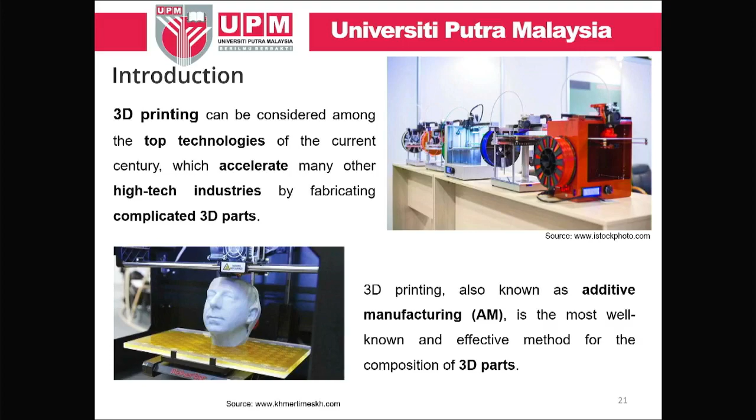Some of us actually know this as additive manufacturing because of the process involved. So I hope the animation is working.

You can see this is a comparison between machining and 3D printing—just a little bit inverse. Machining normally uses a subtractive method, so you have to remove the material. At the same time, we waste energy, waste material, and waste human labor. By doing this machining, you can see from this animation that all the material is removed from the block that we want to machine.

This is the machine at our lab—this is the list, I'm going to show later on how the process is done. And then this is additive manufacturing: we start layer by layer, and at the end you have your part. So it's very easy and simple to do.

But even though it's simple, there are a lot of processes inside that, as well as parameters that you have to control during the printing process.

This is just to show the printer that we have at the lab—we call it Race 3D. There is a voice for that, but I purposely muted it; this is just the machine that we have at the lab. So anybody interested to print something, please come and see me, and I can print out whatever design they need, limited to a certain dimension and so on.

So we're going to go later on with that.

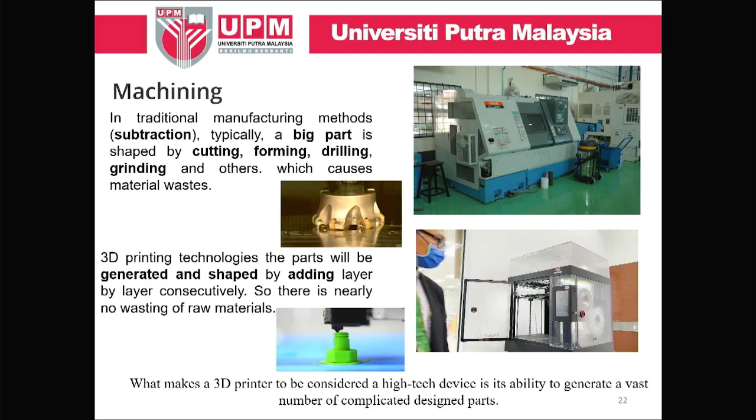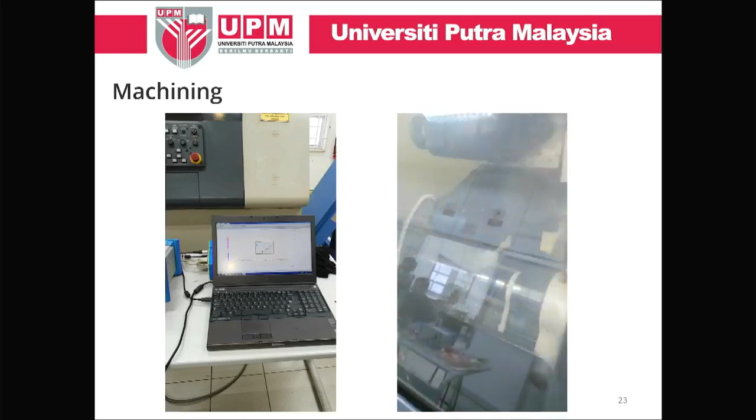This is basically how we measure cutting force during machining. You can see that we have a dynamometer. We bought it for 300,000 ringgit, and I think it's well worth spending the money because we can get the mechanism of the cutting process. This is the cutting process that our Vice Chancellor has been asking about just now.

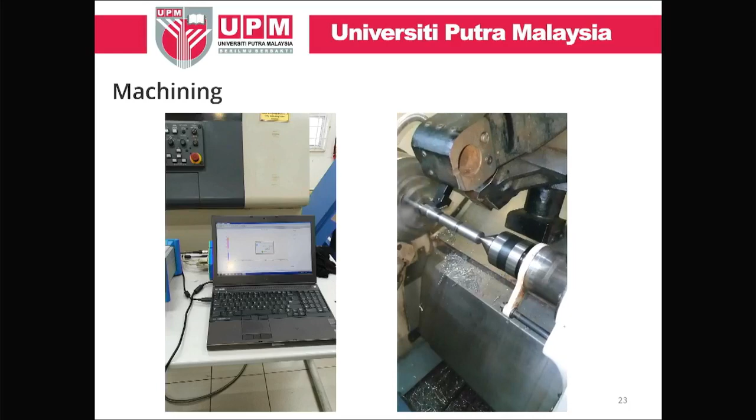I hope he can understand what's happening in machining. So basically, it comes with this, we call it cylinder stock. You put this cylinder stock in the jar, then you clamp it. After that, you use this cutting tool, a special cutting tool that we developed together in the lab. When you machine, we rotate this, the cutter comes, and then you can cut according to the design that you have.

I hope the video can capture that. So we have to find out what happens during the machining, because even with our naked eyes we cannot see the mechanism of what happened inside. The issue with machining is that we have to remove the material, and at the same time control the temperature during the machining.

This was done by Dr. Rosdi. Last time we managed to get a new cutter, we call it dual point cutting tools, and it's still in the process of commercialization. I need to see NCPI later on to make sure this can be commercialized.

This is the work that has been done with Keio University, because at the time we did not have a 5-axis machine. We try to get it next year, maybe, for 5-axis. We call it composite fiber reinforced plastics.

We have Kevlar, sandwiched with the aluminium, so the thing is around 10mm. It's very hard for us to machine, because during machining we introduce vibration, so we have to control that vibration. The thickness of the web is very thin, about 1mm, so if you make a mistake, you're going to throw away your whole workpiece or specimen.

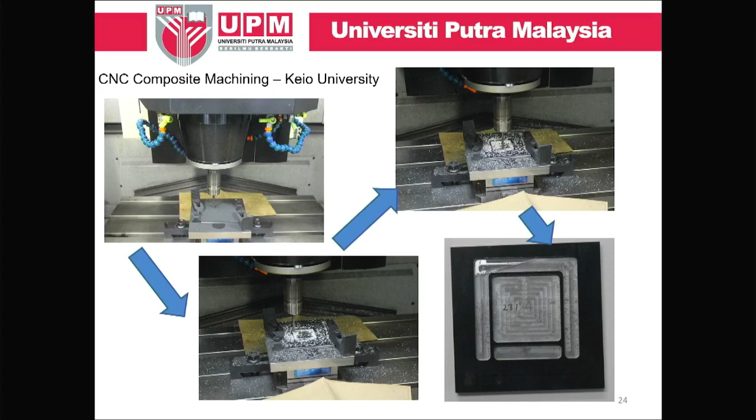Unfortunately, I don't have any more grant to do the research with the ethics approval and so on. So I just stopped with the machine, complete with the nozzle, but it has not been implemented yet for medical use. I hope later on maybe somebody can sponsor me or give me a grant to continue this research.

The reason why is that less waste is produced, because we do it layer by layer. So I'm going to show you some samples here.

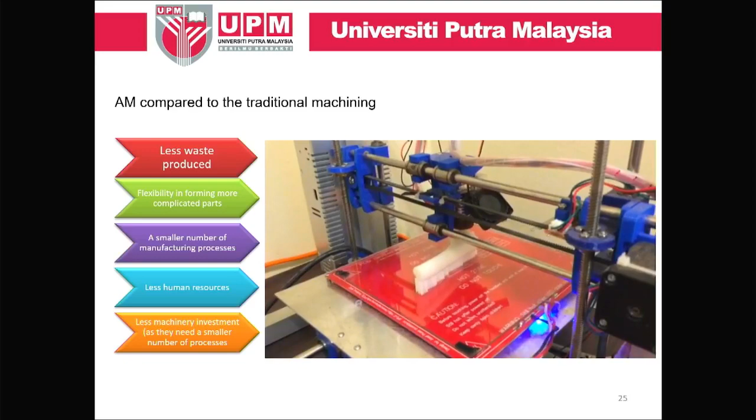It's like a sandwich, like the sandwich you eat today. So it's the first layer, and we print all of the first layer, then we come again with the second layer, and then the third layer.

This is the problem we're facing with 3D printing, because layer by layer, there is a possibility of defects between the contact of the first layer, second layer, and third layer. So that's very basic about 3D printing.

Then I would like to highlight as well, this one that I think everyone has seen. This is the bone, a replica of the bone we can print using our machine. It's very nice and easy. If the Faculty of Biomedicine needs it as well, we can print it out of our own machine.

And this is the one that nobody wants to see. This is a skull, alright? Oh, the Datuk Vice Chancellor wants this. Okay, I'll give it to her.

This one, the machine capable of printing this, we call it porous bone. The reason why we printed this is you can put this inside your body if you got an accident and so on, it can replace the damaged bone, and then it will eventually promote the growth of the cell bone. So that is our intention. But there is an issue that might be a debate later on, so I'm not going to go into that.

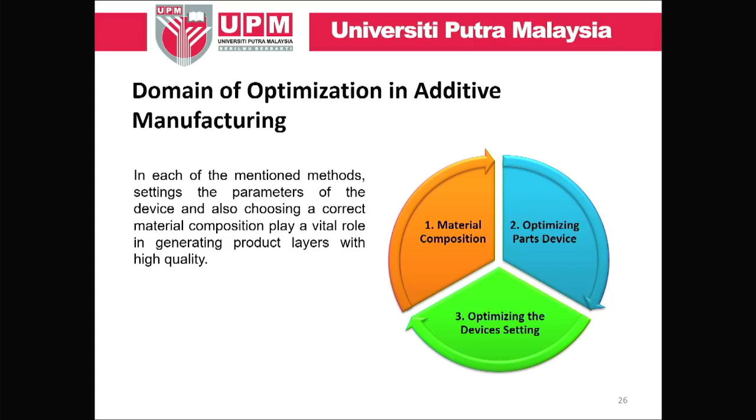In optimization of additive manufacturing, we have three areas. The first one is material composition. Second one is part device, and the third one is optimization of the device setting. So in a nutshell, for the basic understanding of 3D printer, basically it will consist of three areas. In terms of technology, it's sintering, melting, and stereolithography based on the resin.

By looking into this, you can develop up to 7 different regions of the 3D printer. The first one is based on resin. Second one is based on material jetting. The one that we have in the lab is material jetting, so that you can get a very good surface finish. And one is binder jetting, this is based on the powder base.

And the third one is material extrusion, the one that I'm embarked in, the research that has been done in. We call it, in short form, FDM. And we have inkjet printing. This one is basically used for biomedical purposes, to print tissue. And some of them might be printing of the tablet that you eat, can use this technology as well.

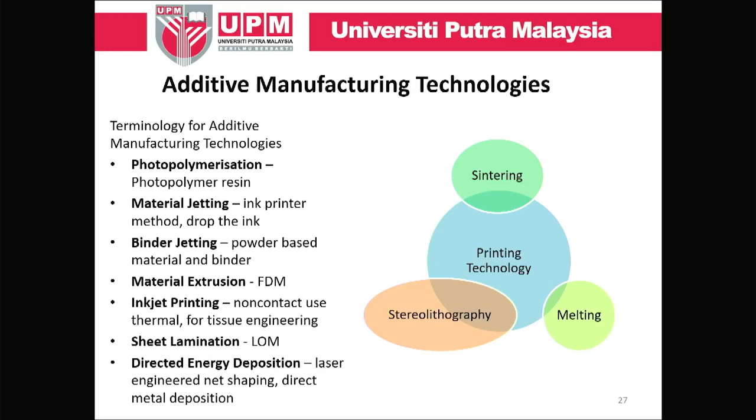And this is one, the old one that you can find, LOM, Laminated Object Manufacturing. And then directed energy deposition based on, so this is basically if you want to print a metal part. And also some of them will be used for printing the aerospace component parts, like titanium and others. So this is the one that I saw in Northumbria University when I did my degree in the year of 1997.

So this is why my passion actually came to this machine. How on earth can this machine produce a very simple part using the CAD design. At that time, 1997, you had to have the server and also workstation in order to use CAD. So it's very difficult, you had to have booked your time to go for the workshop and then design your own part and so on.

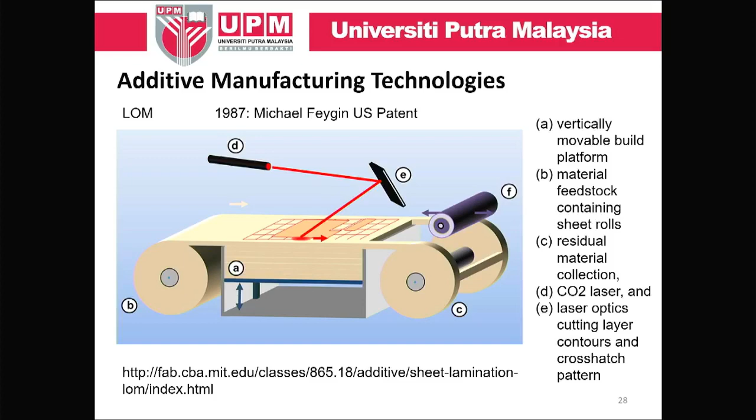After that, you can print using this machine. So what we did with this machine, we can print like a fan. This is a caliper for your car when you brake. So you print this, and then this is a cover for what we call gearbox. And what we did with this, we have this pattern and we put it into sand casting. So we remove the pattern, afterward we put the aluminum or the steel to make sure that you can get your gearbox. So just imagine how important manufacturing is for you, for your life, in fact.

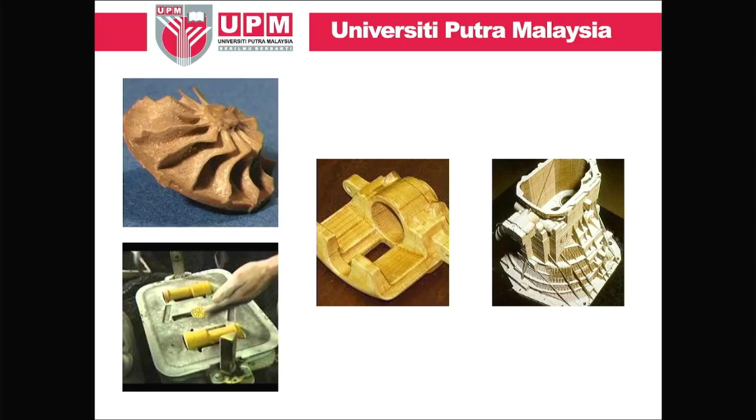So we have another method like sintering, this is basically based on the powder. And then we have another method called melting, this is the one that actually Prof. Tuah just mentioned. We can produce the pill using this technology. So you can mix or pre-mix inside that, and then you can produce the pill according to whatever ratio that you require. So we call it melting technology, and then it looks like injection molding. I'm working on that, I hope you can understand what injection molding is, by the way.

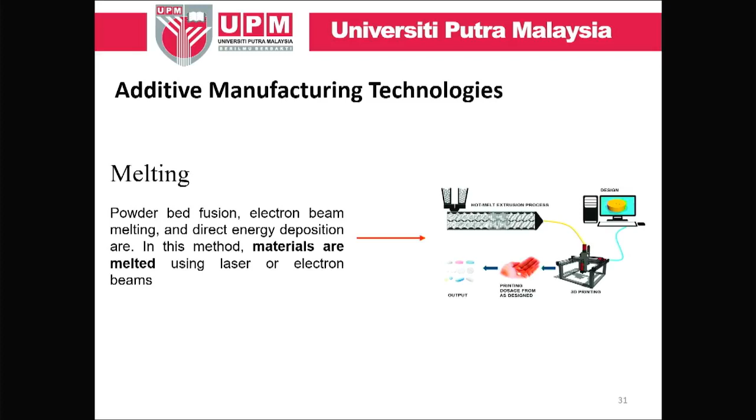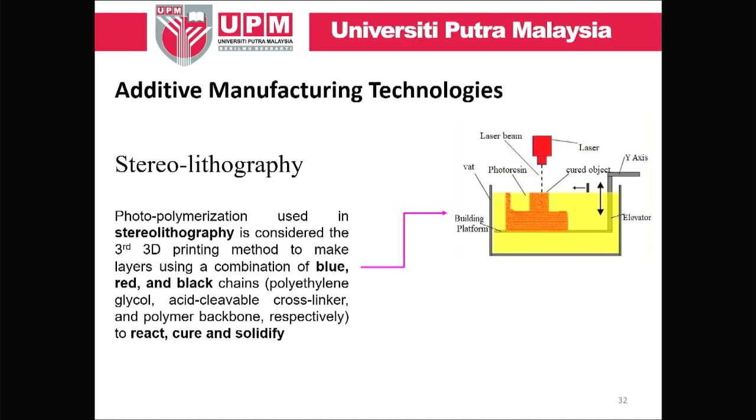And then this is the one, actually, the best one for the surface finish. If you print using resin, definitely you're going to have a very good quality surface finish. And then the one that interested me and Dr. Aiman, I cannot see Dr. Aiman, maybe he's waiting outside, so this is FDM.

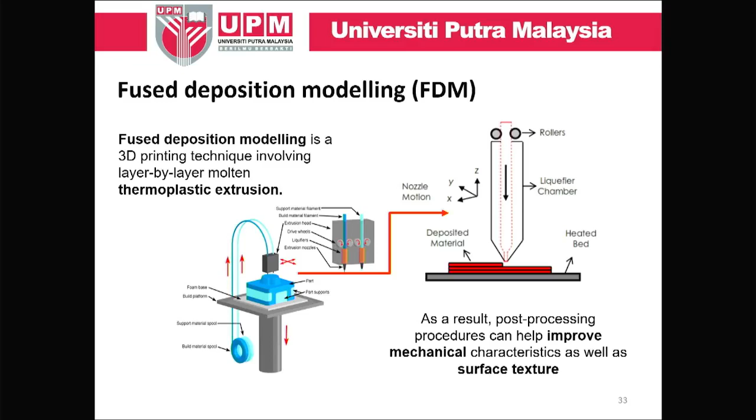So eventually you're going to have the raw material of filaments. This filament will be fed into this liquefier chamber so that you can heat the filament, it becomes liquid, therefore you can print after that. So might be someone interested in this, these are the parts that we can produce using this technique. Okay, this is metal, this is basically what you print and then you can use straight away, no need for another second process and so on. So it's not a prototype anymore, it can be used straight away in your application.

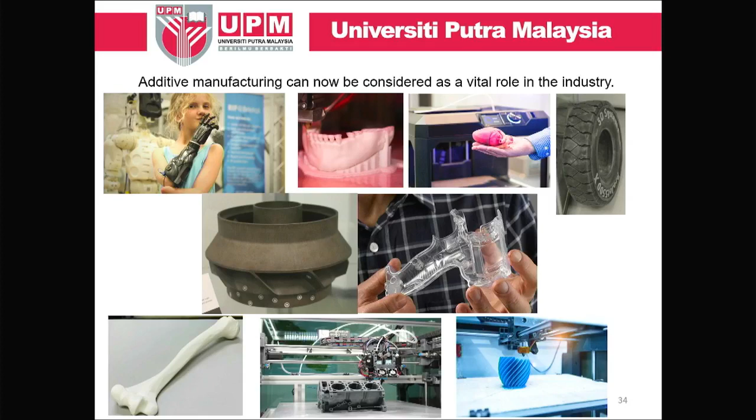Now I'm going to move a little bit into the research that we've done. As I said, we have conditions, parameters, and also process that we have to make sure we can have optimum parameters for.

First one is the material itself. Second one is the part, like the nozzle diameter and liquefier shape, and also the process itself, including build orientation, layer thickness, infill pattern, and infill temperature.

In order to reduce the waste of time, we use computers to check whether the optimum parameter can be achieved. Usually we use CAD—most of us in the lab use SolidWorks or CATIA for the design. After that, we use computer-aided engineering, like finite element analysis, to analyze the optimum parameter before we put it into the machine.

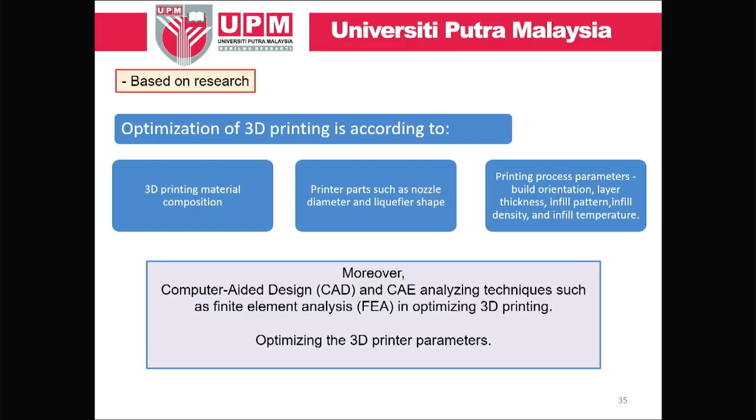This is work that has been published in Q1 and Q2 journals, Alhamdulillah. You can see different temperatures give different results, and we have to control this temperature. That's why I use optimization methods like fuzzy logic, genetic algorithm, neural network, and so on, to make sure we get very good surface quality when we finish.

At the same time, we are looking at the mechanical properties of the part we produce. In a nutshell, if you have a low temperature which is not according to what the material requires, you're going to have low bonding between each layer, which affects the surface finish—what we call the engineering RA value.

If you excessively give the temperature up to 260, which is for PLA, then you're going to have the road width—not the road, we call it road width—become bigger, expanding during the process, so you cannot get a very good surface finish again. That's why processing parameters are very important.

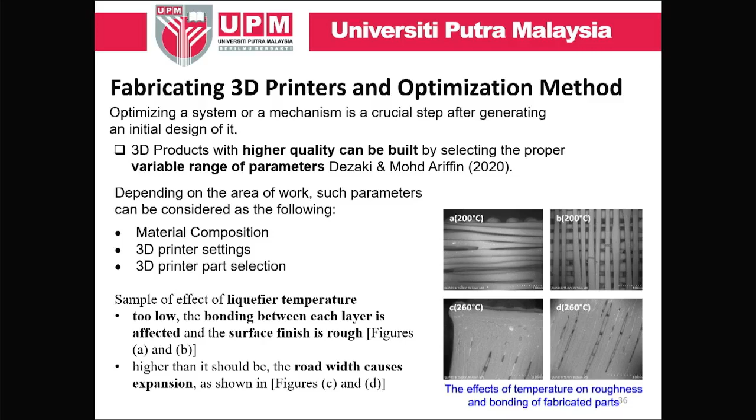This material work is done with Prof. Tariq. We are looking at green composite material—we add kenaf to PLA to make sure the green material can be sustained, you can plant it and so on. Afterward we make that become a filament, which goes through the nozzle of the 3D printer.

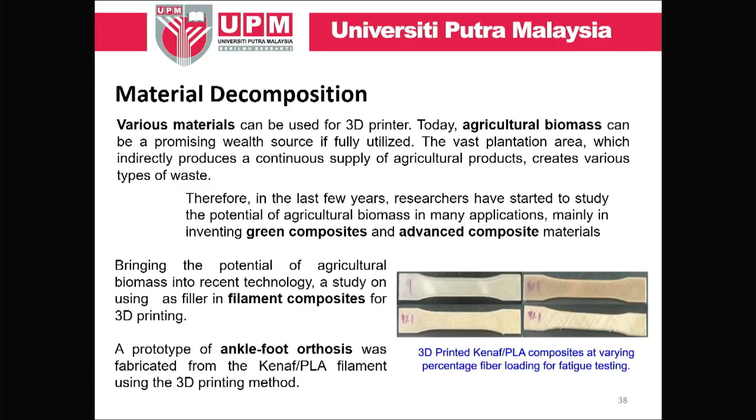This is a test specimen, basically for the fatigue test to make sure it complies with the standard or not. This one went through our test, and fortunately we managed to print an ankle foot orthosis using this material.

As I said before, our purpose for developing this machine was to print biodegradable material, based on PMMA. So we have to test the compression—you want to compress the material so you can know what load the material can possibly take.

It's very important because we need to know the load. Otherwise, if you put this material inside somebody's hand or leg, and when they stand up, suddenly it will collapse because there is no load capacity. That's the reason why we test this compression.

Luckily, this material is very strong, and it can be used for the porous bone—it can replace human bone based on our study.

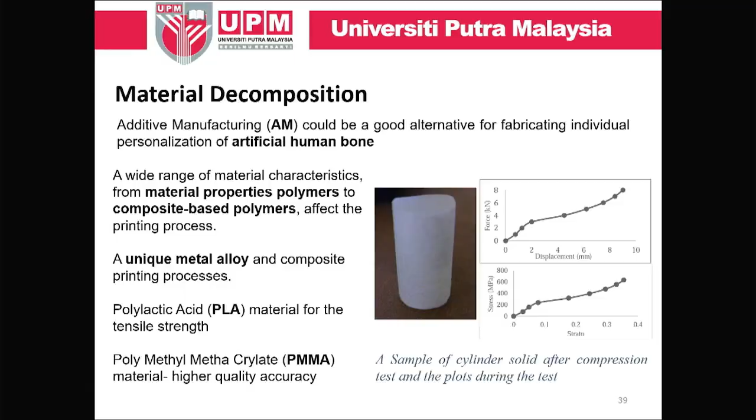But as I said, unfortunately we stopped at that specimen and did not go further, because there is an ethics issue—you have to get permission and so on. That's why we don't go further.

This is the printing process—this is what we discovered from four parameters. In a bit more detail: layer thickness, infill patterns, infill density, build orientation, and distribution temperature and pressure drop—these are what will affect your printing quality.

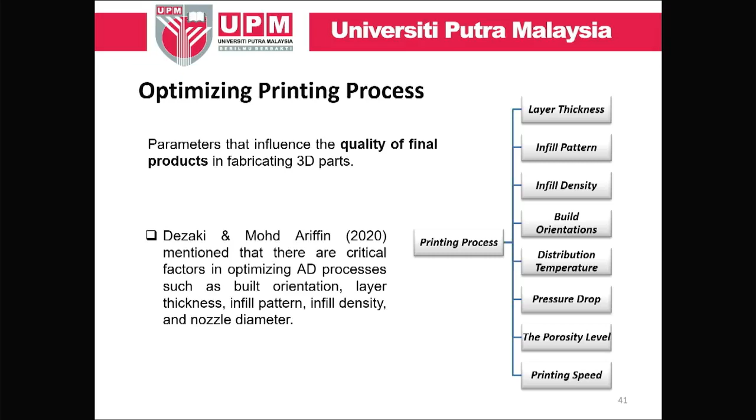At the same time, we managed to get a new nozzle using different diameters. This has been patented, Alhamdulillah, so we can commercialize it and send it to another company for their 3D printing.

This is work done with Dr. Aiman. We found out that in the end, the parameter of build orientation and layer thickness is basically the most important factor affecting surface finish.

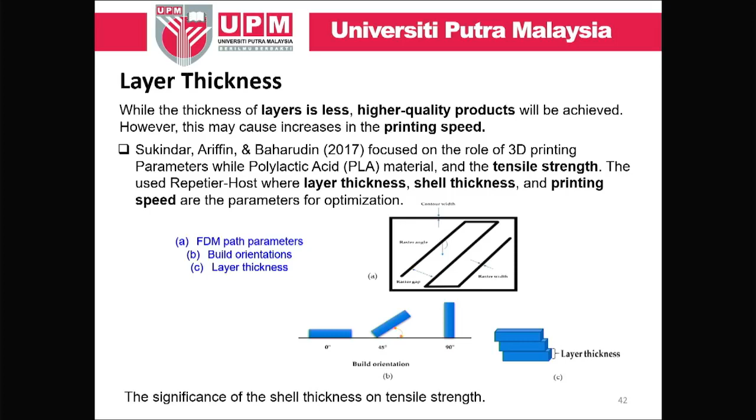I further extended this finding by researching build orientation not only flat, but also on edge, to check whether it could be further improved.

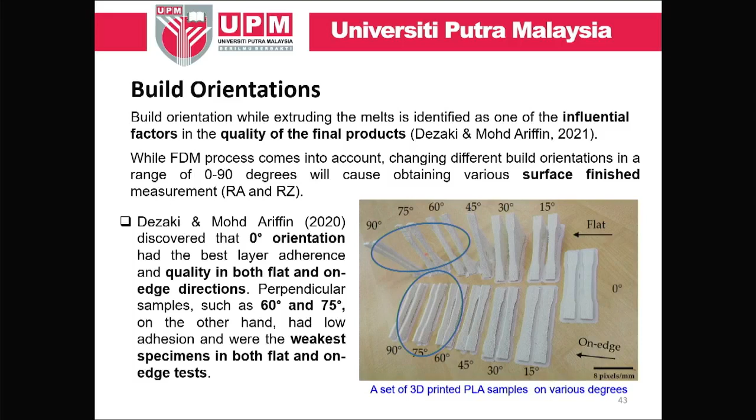From our finding, the 60 and 75 degree checks always give unreasonable conditions, meaning you cannot even print the specimen. So from our finding, for this build orientation, 0 degree is the best one.

You can see from the photo, structure-wise, the RA value and so on—0 degree is the best one.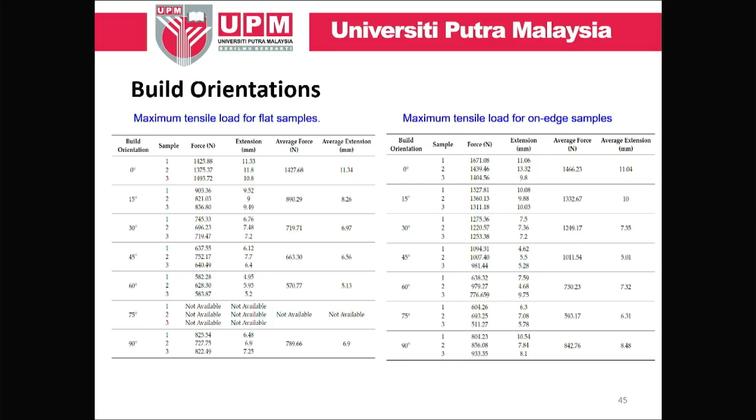I would like to highlight also in terms of porosity level. So why do we need to do this study? Basically, we want to reduce the material, even though in 3D printing already less waste material. We try to reduce again by introducing what we call porosity. So we have different designs in terms of inside the part by using this honeycomb design and also grid design. Eventually, it's going to give you the best in terms of strength to weight ratio.

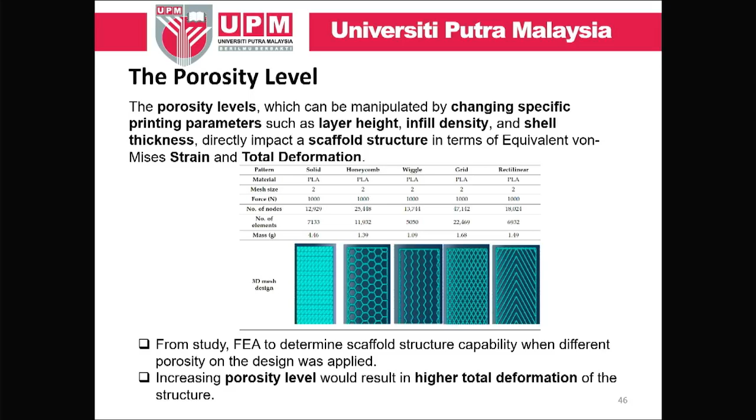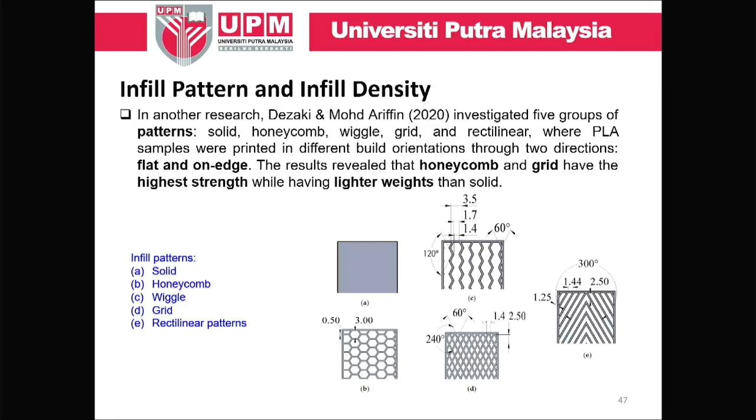So this is the geometry that we designed in our lab using CAD/CAM. After that, we print, and then we get the honeycomb and grid, best in terms of high strength and also lightweight. This was very important for the aerospace industry. We want the one that has very good strength. At the same time, the material has to be very lightweight. Otherwise, you're going to pump more oil into the airplane and so on.

So this infill pattern, as I said before, we want to do it from biomedical or medical grade material. This is very important. If you have a 10% infill, basically you're going to promote more cell growth. But if you have 50% infill, then cell growth is very difficult. So we have to find out which one is better for the bone.

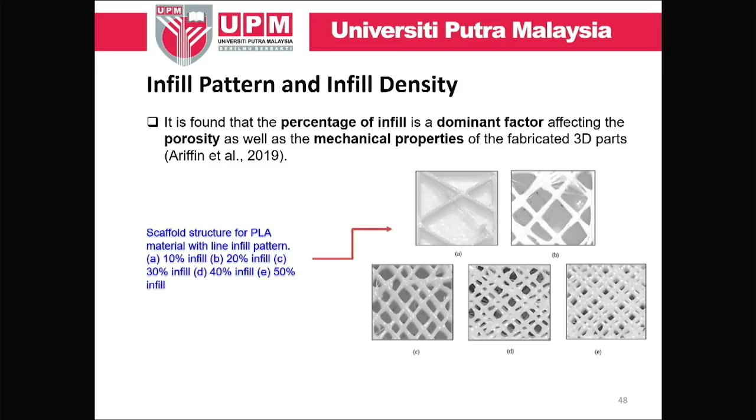And the next one, this is the one that I've been talking about, pressure drop. This is something not discovered before in FDM. Industry already built the machine, but they did not discover this pressure drop. So we managed to identify a pressure drop. If you have a lot of pressure drop, definitely you cannot get a good quality product when you print.

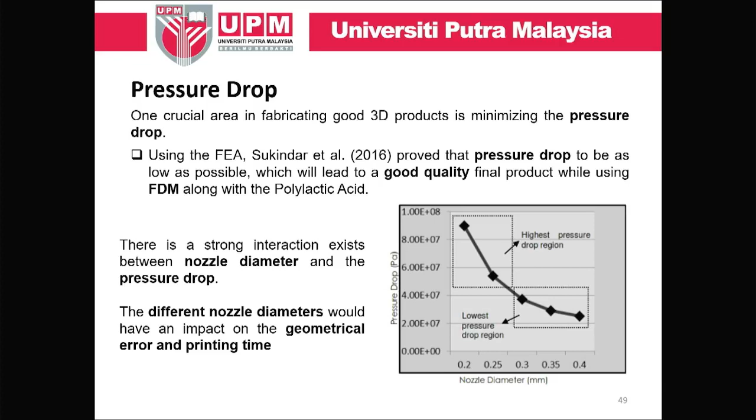So this is the analysis using finite element. You can see that for PMMA, the pressure drop convergence area is 130 degrees for the die angle with 0.2 mm nozzle diameter.

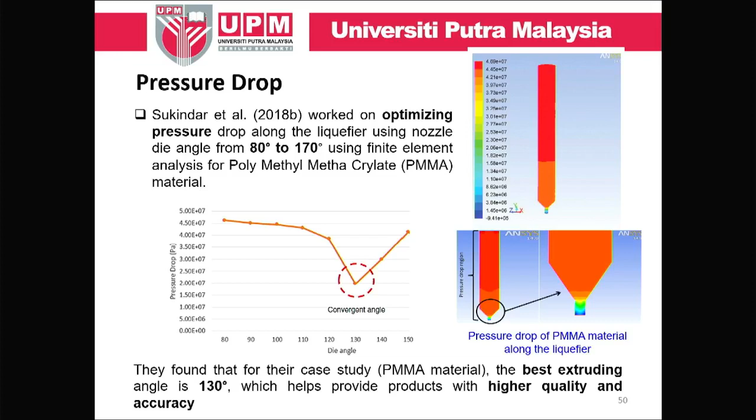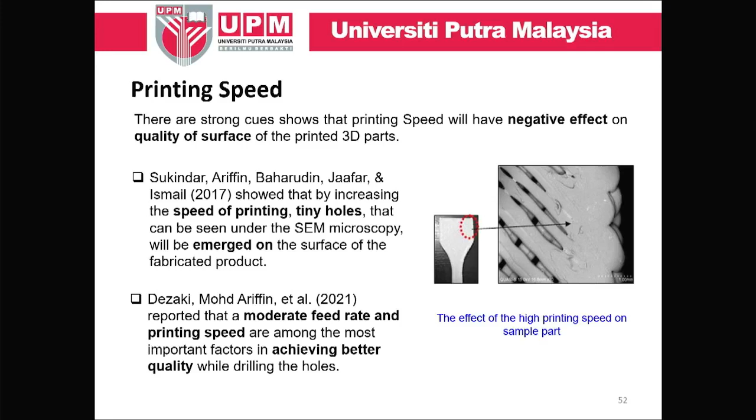I moved a little bit faster just now. I think time is not permitted anymore.

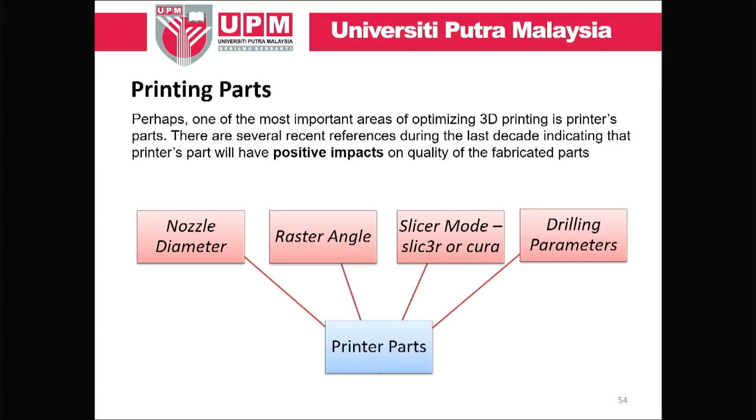Okay, the one I'm going to show you is this, basically nozzle diameter. We managed to control the pattern. At the same time, we have to control the liquefier area because temperature is very important during 3D printing. We have to ensure stability in terms of temperature. At the same time, when you print and the next filament comes into the system, you have to make sure that every time you can have good temperature control inside that.

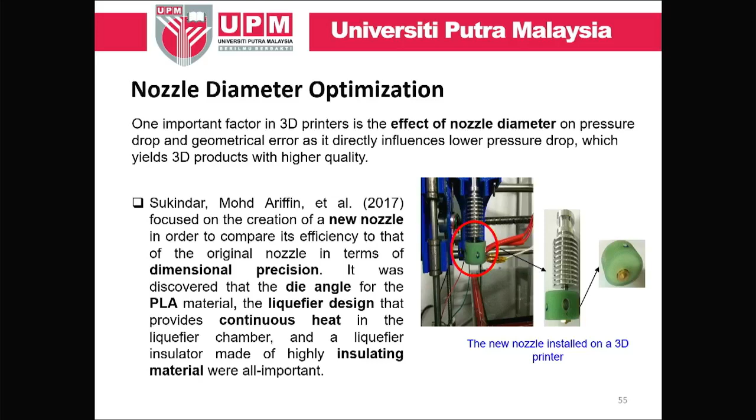And this is in terms of nozzle diameter. So different diameters are going to give you a different surface quality finish, and at the same time, give you different mechanical properties as well.

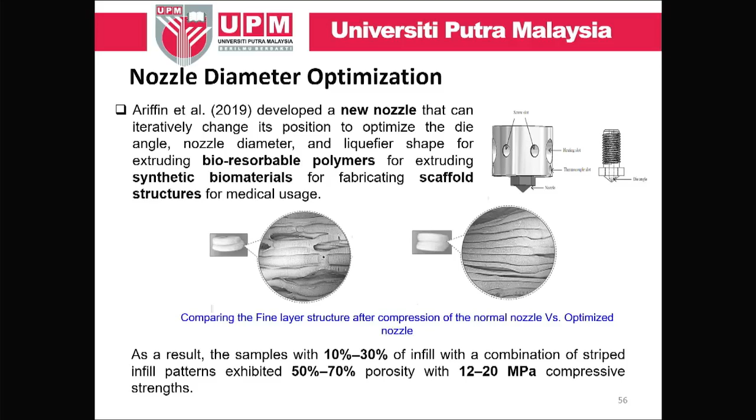So from our study, the one that we recommend is 10% to 30% infill combined with 50% to 70% porosity, which will give you 12 to 20 megapascal in terms of load that the material can withstand. That is very important if you want to put the bone into the human body. This is what we found, and it's been published already in 2019.

And this, I compare with the slicer method - Cura Engine and Slic3r. The way that you slice the 3D CAD in terms of angle will give you a different result. The best is Cura Engine, whereby you cannot see any leftover material. But if you use Slic3r, you're going to have a little bit of so-called leftover. But I would like to state that Slic3r is not always bad. It can be used for support material because we do not need the support material after we complete our product.

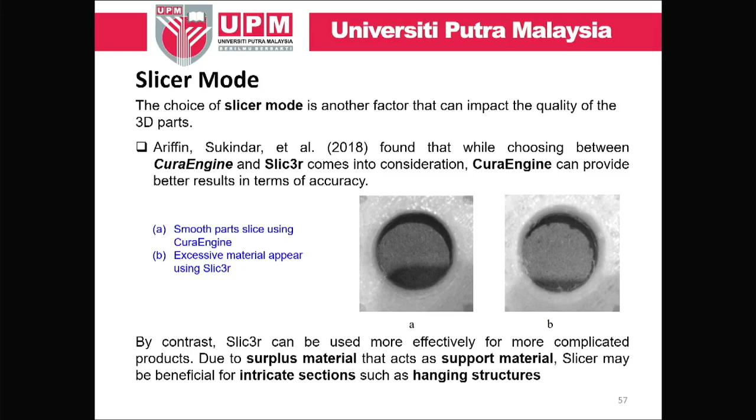About raster angle, the finding is 45 degrees is the best one. And we also extend our research to drilling parameters because some post-processing is needed to make sure we can get a good surface finish for the FDM technique.

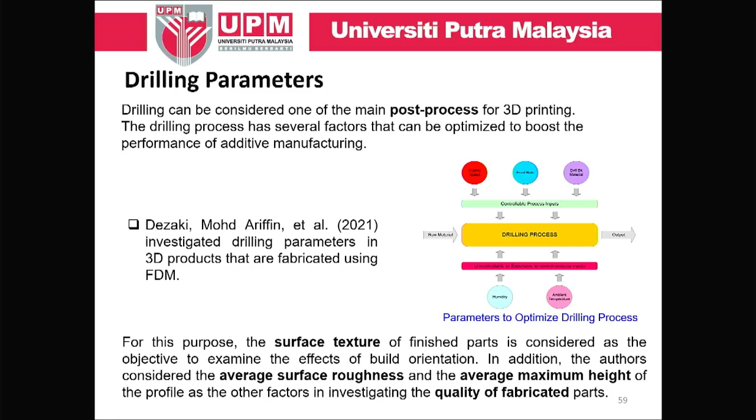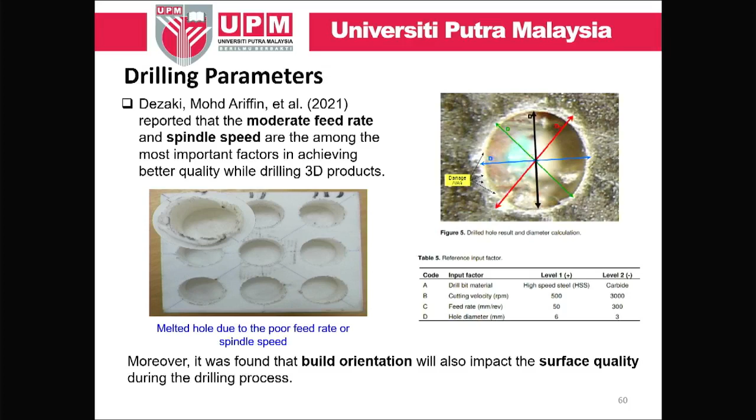According to our research, we can say that moderate feed rate and also spindle speed will give you better quality in terms of drilling of the part.

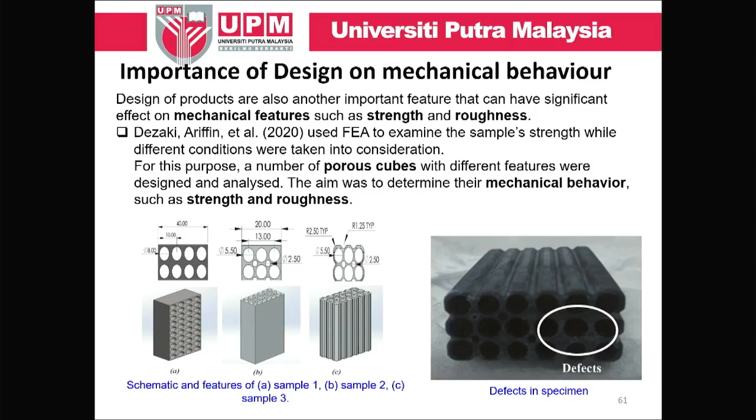Next, Dr. Dezaki is in the lab doing work using the 3D ProJet machine. We use this inkjet type printer, and we would like to check which one is going to give the best mechanical behavior, strength behavior, and roughness for the material. So we print out the experiment and compare it with the finite element analysis.

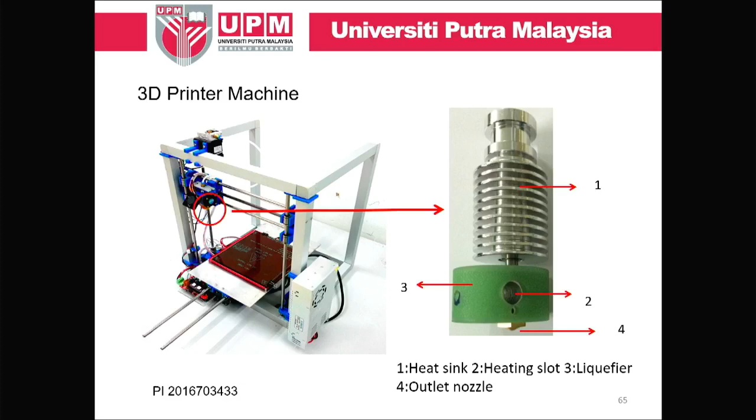I have a little bit more, Datuk. This is the machine that we produced, and it's ready for you to see outside later during your food time. This is patented, number 4, very small, like nano size, even your eye cannot see it. That's why it's very difficult to find the optimum parameter for this machine. And this is the patent.

On top of that, I would like to highlight our work with Steelcase, which has been recognized with a gold medal at IANA 2022. Dr. Azimi was there, but eventually it's not been put inside because it just came from Germany in October, right? Dr. Azim, October 2022.

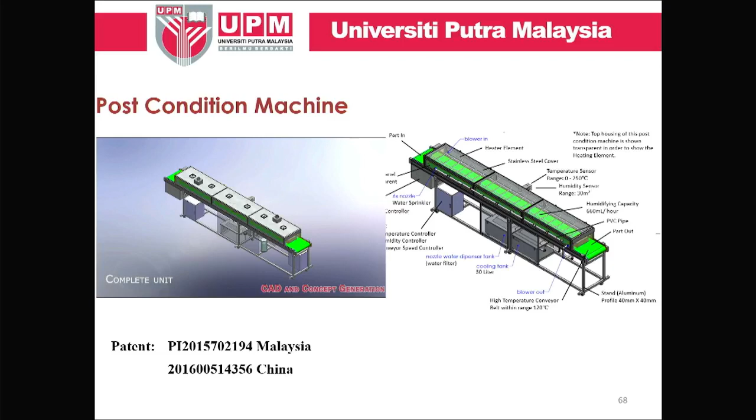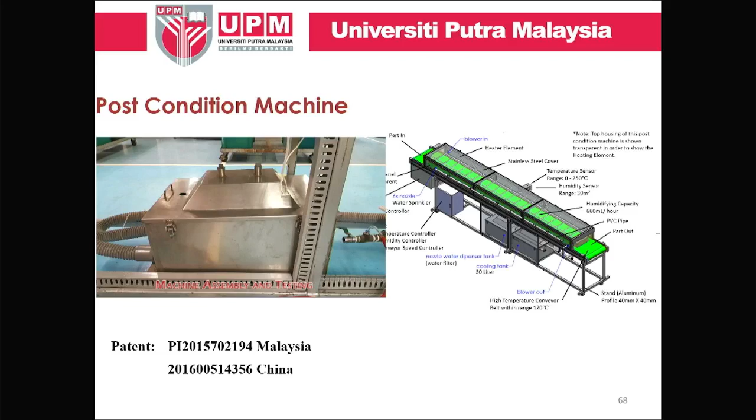This machine, you can see it outside. It can be used to stabilize nylon 6, as our Vice Chancellor mentioned. It's very important for injection molding when they inject the plastic, and then we can stabilize it to make sure that the plastic will not absorb more moisture content from our environment. With that, the plastic can be exported outside of the world.

So it's not only in Malaysia and so on. Otherwise, they have to wait for 2 or 3 months to make sure that this plastic will stabilize itself. So it's going to cut about 3 months of waiting time by using this machine.

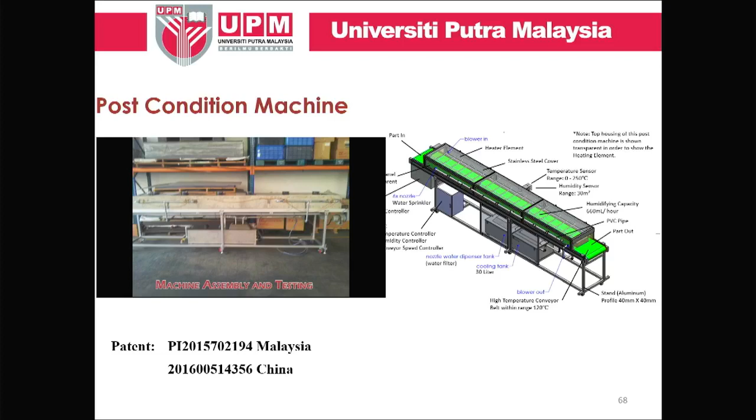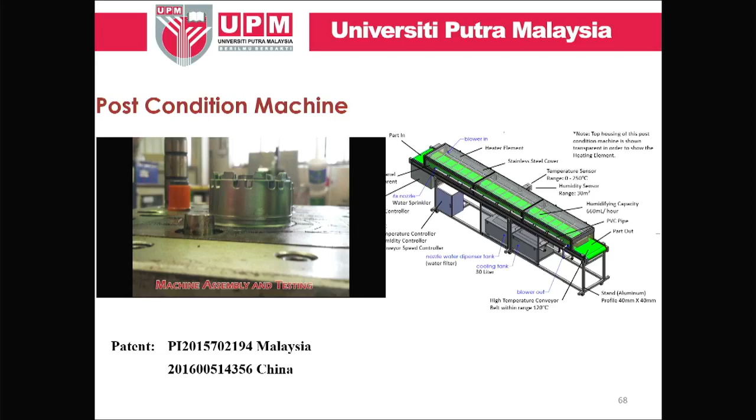The machine was set up in Steelcase Industry Penang, Gapi Industry in Penang, and then we managed to bring the machine back to UPM, so we can see it outside later. This is the process of making the machine. It's not simple, it's very complicated because it involves a lot of sensors, a lot of processing conditions, and so on.

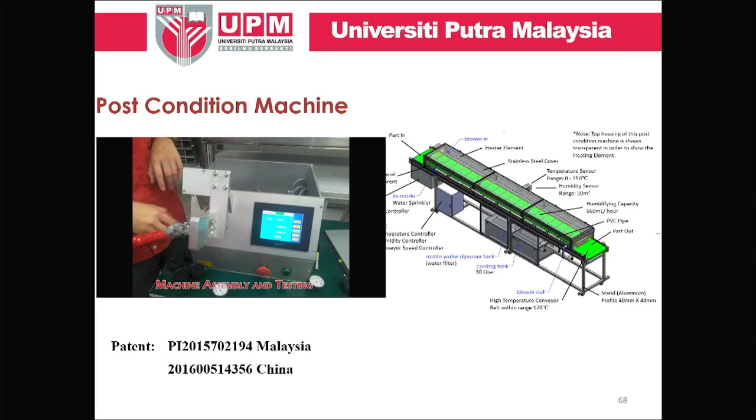Next, this is the one we are looking for partners to commercialize. We managed to get a dual point cutting tool. This is dual because currently the machine has a rough cutting, and then you need to do a finishing cutting. So using this cutting tool, in Malay we call it mata alat, you can only cut one time and get a very good surface finish. By doing that, you can save your time and at the same time save your energy.

So we measure cutting force and so on, but unfortunately, because of cutting two at one time, the force is very hard. So we try to coat this with a special coating using special material like titanium carbide and others. The sample of the cutting tool you can also see outside, and Kamal is here to show you the effect of this multiple coating on the cutting tool.

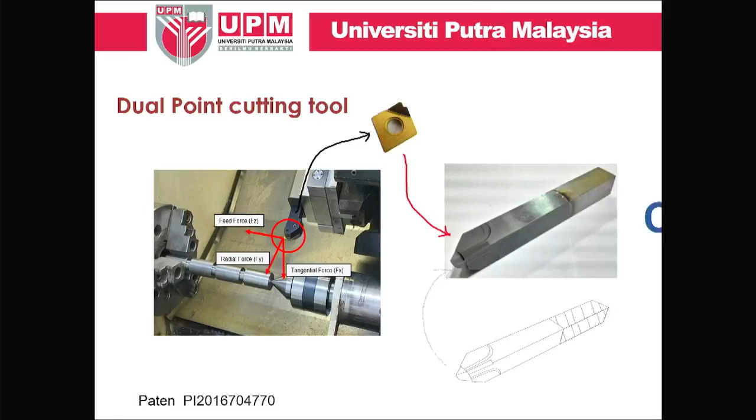Second, biomedical scaffold structure was successfully produced using the 3D printer. We managed to fabricate consistent and accurate scaffold by determining the parameters for infill percentage and infill pattern. There should be much more research done to make sure this printed biomedical scaffold structure can be put in humans, so we can see the cell growth and cell proliferation. Infill percentage and infill pattern will significantly affect the porosity of the scaffold.

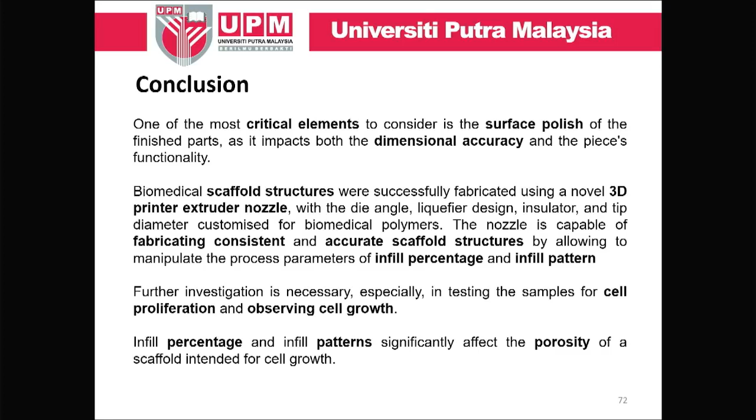I would say that if you change a little bit on the component of FDM, you're going to have extra features. At the same time, you can improve the product properties, and also reduce the drawbacks by using this FDM. FDM basically can give you more tensile or flexural strength, but it's going to limit you in terms of existing drawbacks. The major issue with FDM is the surface quality of the part produced. Changing the temperature and nozzle diameter will eventually give you a good quality part.

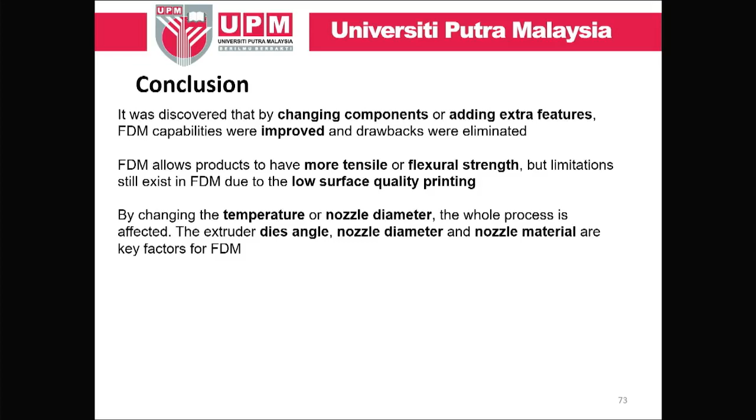Machine development definitely requires major design work and issue resolution in order to get high quality, and at the same time people are looking at low cost budget 3D printers. Most defects can be reduced by pre-processing, like we did using CAE, and also post-processing as we did for drilling and so on.

The next one, I think people are looking for the printing of metal alloy. I believe we are now working very hard to make sure we can print metal alloy using fiber laser.

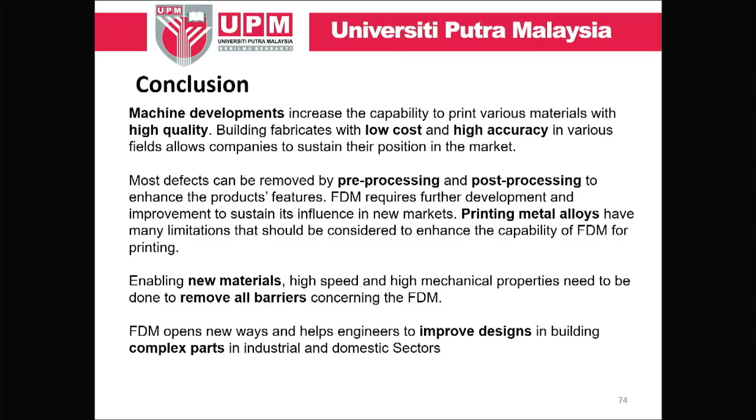We managed to get a fiber laser from the ASEAN University Network program under JICA. It cost around 600,000, Vice Chancellor, but they gave it to us free of charge. Alhamdulillah, it's in the lab now.

Two of my PhD students, one current and one new, are working on that to make sure that, inshallah, within 3 years' time we're going to have a method for 3D printing using fiber laser. This opens new ways that help engineers improve design in building complex parts in industry and also domestic use.

Before I stop, there is one video montage of about 3 minutes that you can see and enjoy. Okay, please, secretariat, can you run it?